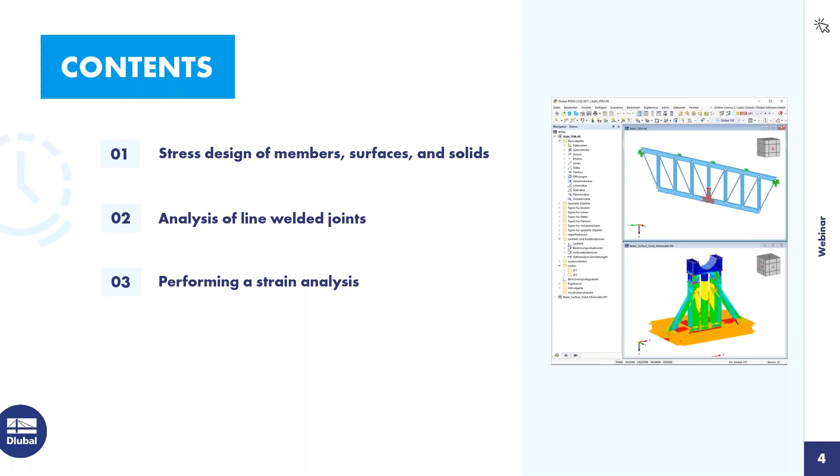I will do it as a live demonstration, so I didn't prepare any additional PowerPoint slides, so I will jump directly into the program. And today I also would like to work with predefined files in order to keep the focus on the essential topics.

What do I have here? I have a mixed structure here, mixed in the meaning that I have a member structure, surface elements, and also solids. Let me quickly change the rendering so you can easily see the differences. On the bottom, we have this member structure.

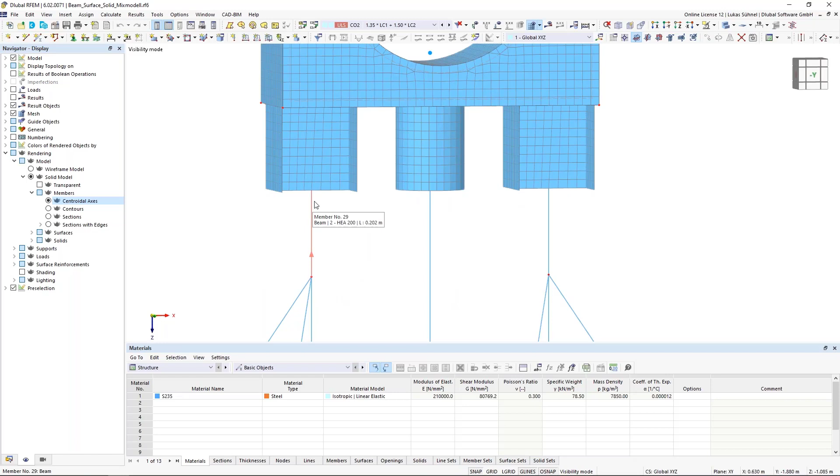Then I converted a certain part of my members into a surface structure, as you can see here. It's just the continuation of my members if I display them again. And on top of that, I have my solid model on which I will place some loads.

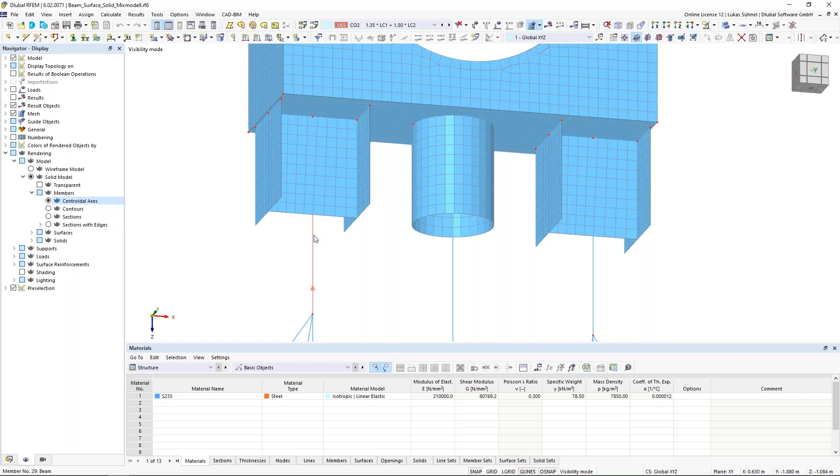Regarding the modeling, which is maybe also interesting to know, in general we can model members, surfaces, and solids in one structure, which is already quite nice. And if you think about the load transfer and the correct transfer of the stiffness, you have to take care of some things when you have 1D elements and 2D elements.

By simply converting these members into surfaces, as I did here, often you don't have a properly defined connection. You can see it on the left. The surfaces in that area are now basically supported on only one FE node, the FE node where this member connects to the web of this beam.

That is of course not correct. You would definitely get singularities in that area, and the stiffness transfer is also not correct. Another example can be found in the center. We have here a pipe section. And when you convert a pipe section into a surface, you get, of course, the pipe surface.

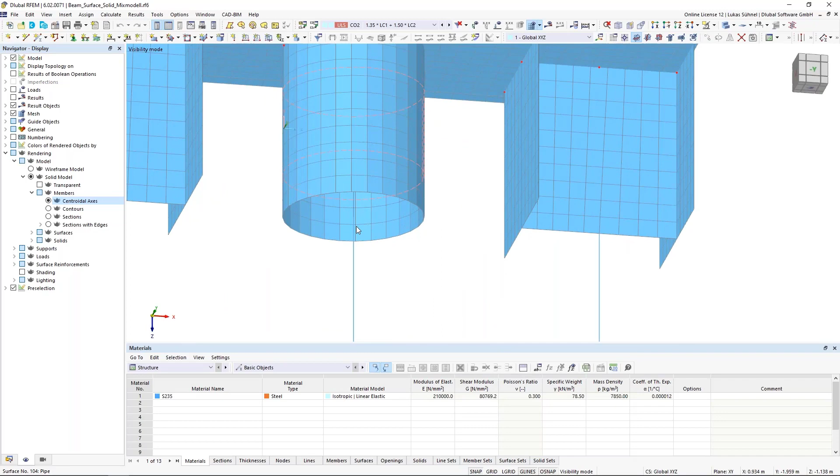And in such a case, you have no connection at all. You can imagine the member is in the center of that circle, and the surface is of course not connected to that member at all. So here we also have to do some modifications in the modeling to have it properly connected.

And I have it here, I just didn't show it so far. So I will cancel my visibility mode, and the connection can be done in, let's say, two ways. I can use so-called rigid surfaces, and this simply will transfer all my forces and my deformations that I have in this beam, or also vice versa in that surfaces, via a stiff surface onto the other side.

In the center, it's even more crucial, because with this stiff surface or rigid surface, I'm connecting my member with my surface. Before I had no connection at all. And again, of course, all deformations and internal forces will be transferred from the beam to the surfaces equally, let's say.

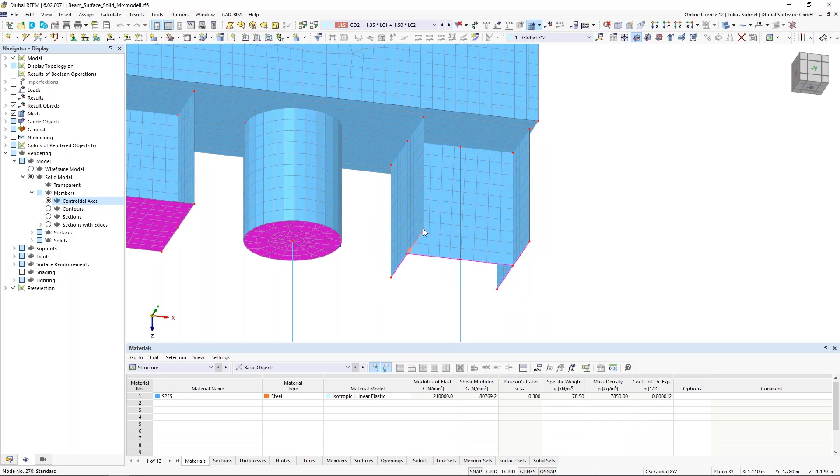An alternative modeling is visible here on the right-hand side. Instead of using a rigid surface, I simply assigned rigid members onto the boundary lines of my surface model. A member with a member type rigid, and it works similar to my rigid surface. So this is how you can connect a 1D element with a 2D element. The rigid surface or rigid member may help you here.

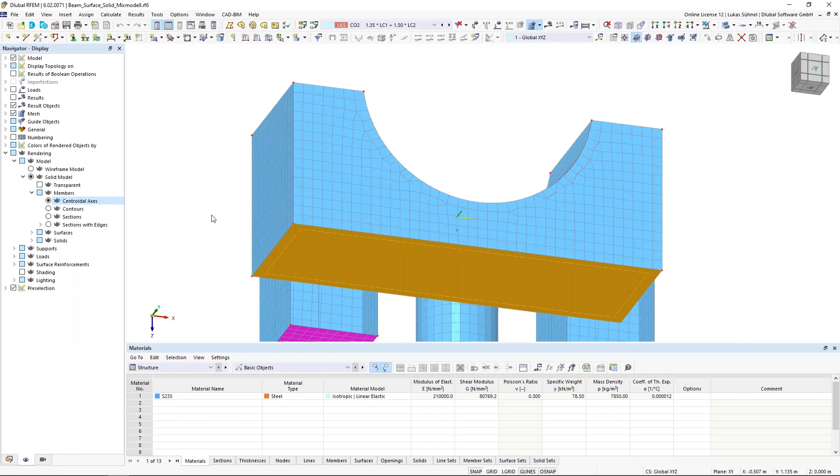Regarding the connection of a surface model with a solid, well, this is quite easy. The surfaces are defined by the boundary lines. These are those lines here, which you can see, and these lines are placed inside the boundary surface of that solid, and we have a so-called automatic object detection in those surfaces.

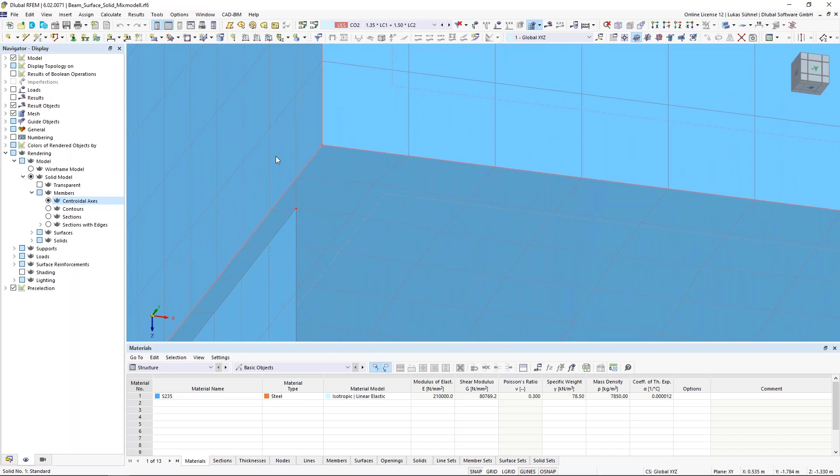So the surface detects that there are lines placed inside the surface, and if that's the case, then the FE mesh generator will automatically consider those lines when the mesh will be generated. So we have a fixed connection between those lines or these surfaces and the solid. So far regarding the modeling.

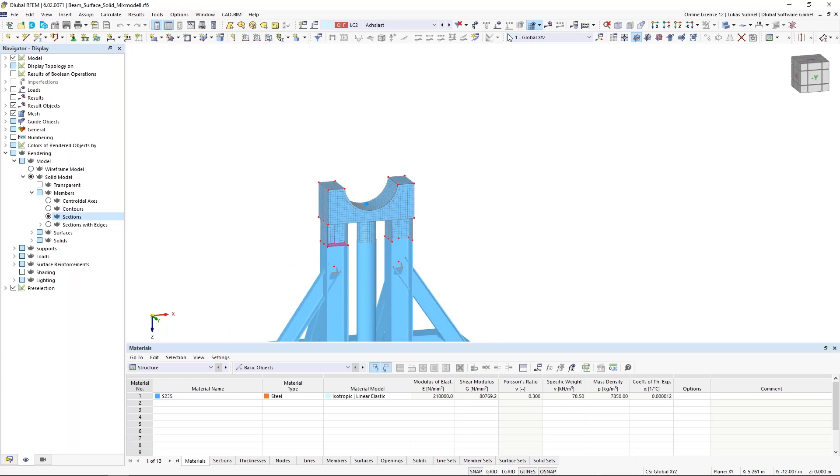Regarding the loading, these are German names, never mind. I have two load cases. I have my dead load case here, and then some load in my live load case. That's all I want here in that example. And of course, we have the combination of those load cases using an ultimate limit state design situation and a serviceability limit state design situation.

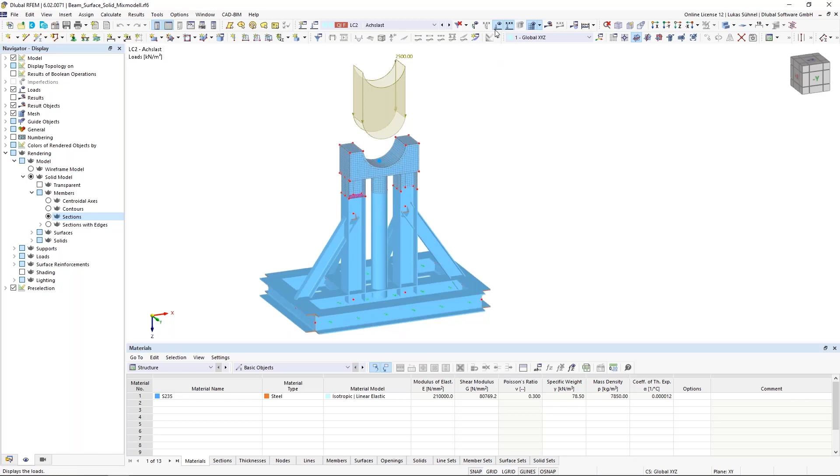Now, if we want to design such a structure, we have, let's say, two main designs that we have to run. We have to run a stress analysis or a cross-section check for our objects, and we have to run a stability design. Regarding the stability design, I would like to take a look at the results first. So that's what I will do now.

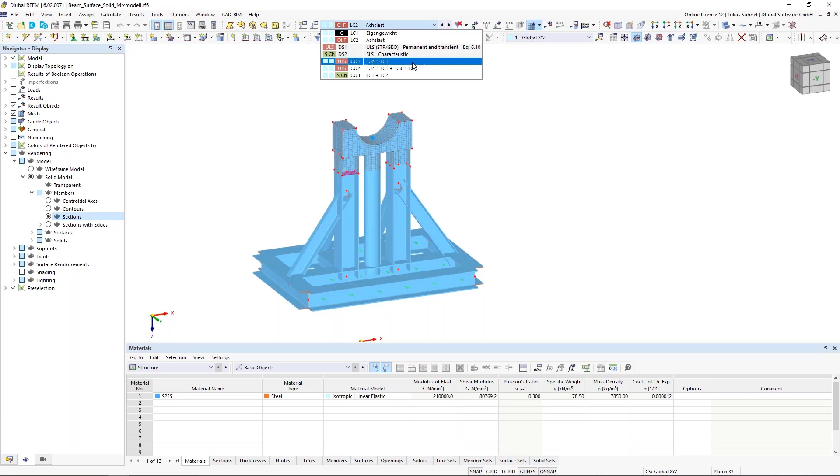I will calculate the, let's say, the important load combination. I have just one here that actually matters, the combination of the dead load and the live load. And let's have a look at the results. Maybe just on the members for now. I can display the axial forces in here, maybe in a different view like that.

All right. And what I can see here is I have, of course, compression in my, let's say, columns or in my members. So compression is, of course, a sign for buckling. So if I have compression in members, I have to check buckling. And what else do I have? I have some shear forces inside, but they are really small. So shear buckling is most likely not an issue. I have really small torsional moments.

I can neglect them. And my bending moments, My and Mz, are also quite small compared to my cross section or to the dimensions of these beams. So I would say also the bending moments can be neglected. What does it mean? If I neglect the bending moments, then lateral torsional buckling is most likely not an issue.

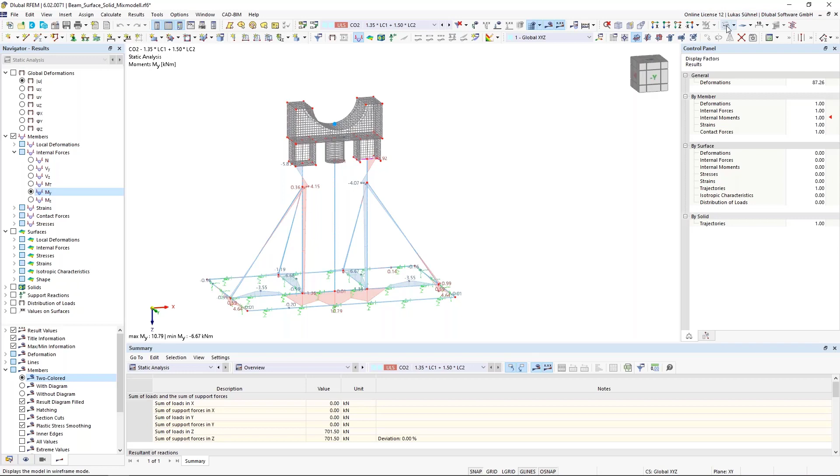And if I check again my structure, I have all these diagonals here that are connecting to my columns, a pipe section, which is where lateral torsional buckling is not important at all. So I think it's fair to say lateral torsional buckling is not an issue here. What could be an issue is, of course, buckling.

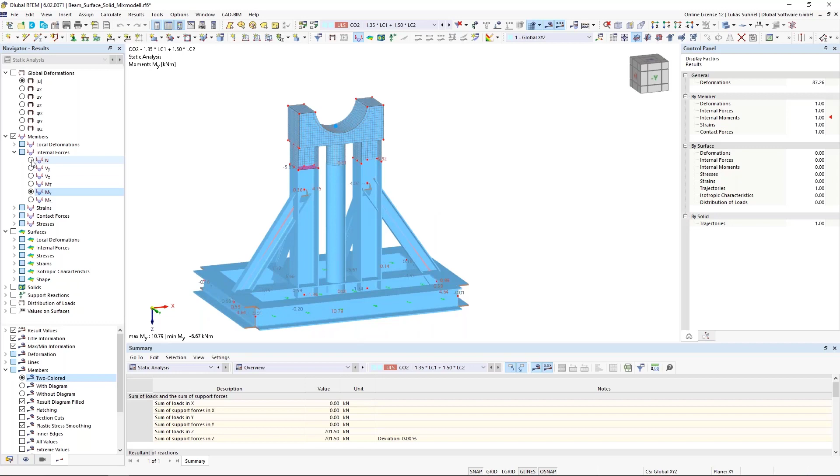But for buckling, I can use some limit checks or, let's say, some specific checks to judge if buckling is actually an issue. And such a check can be found inside the Eurocode 3 in chapter 6.3.1.2(4).

The formula basically is you take the axial force in a member and you divide it by the critical force of a member. And if that is smaller than 0.04, then you don't have to run a buckling check for a member. If we switch it around, if we say the critical force of a member divided by the existing force, if that is bigger than 25, then buckling is not an issue. And this is a value we can check via a specific add-on.

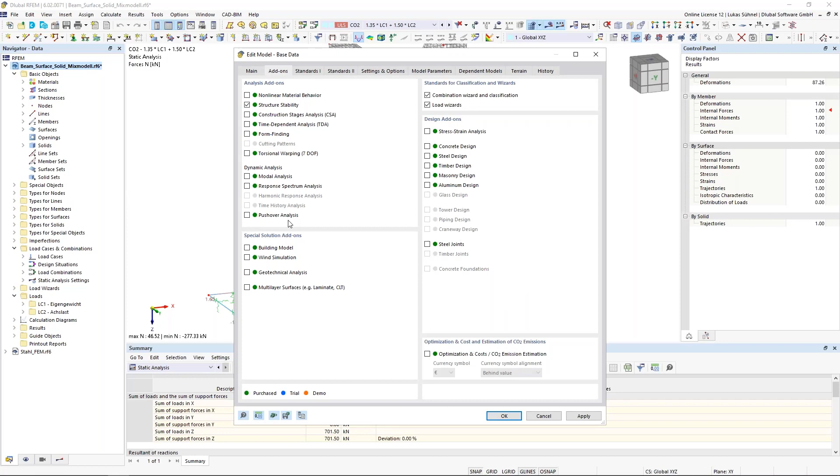And I want to do it quickly before I start the stress strain analysis. So if I go into my add-ons, I can activate the structure stability add-on. Now this will calculate this critical load factor, which is the same as I just said, the NCR, the critical force divided by the actual force. And I will calculate it in this specific load combination. I can activate now the calculation of the critical load, and I will start the calculation.

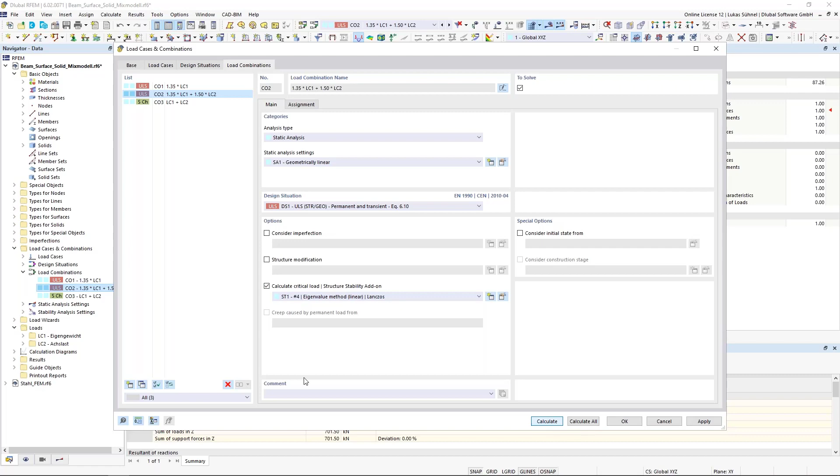So this add-on will calculate this critical load factor. It will also calculate buckling lengths and so on, buckling length factors. For me, important is now only the critical load factor. And again, if that is bigger than 25, then buckling is not an issue. Just a few seconds more. All right, there we are.

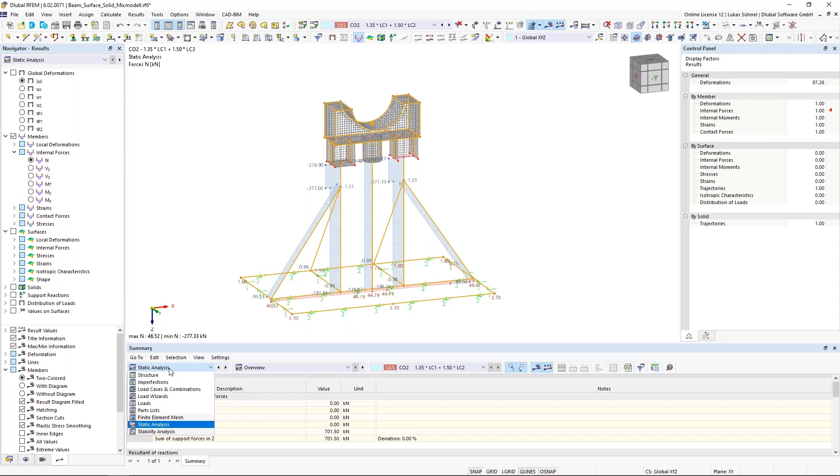So how can I display these results? Well, I can switch in my tables to this stability analysis add-on. And the first value that will be shown here is already the one that I'm interested in. The critical load factor is 29, which is bigger than 25, so I'm good.

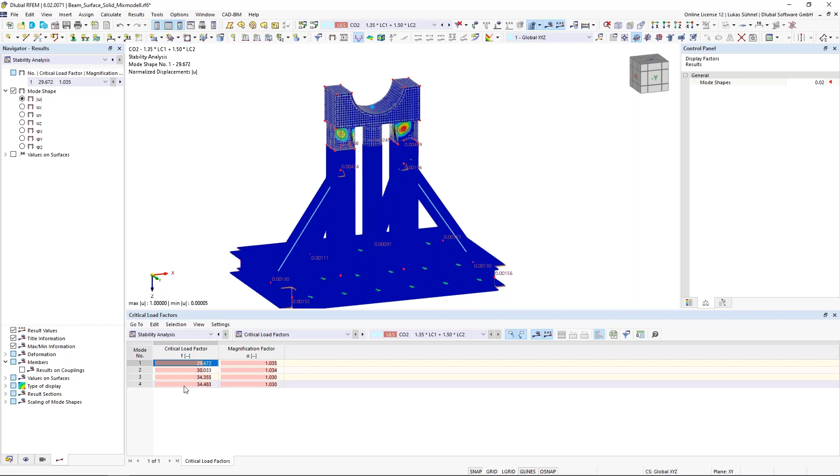And if I want to analyze it even further, I would have to look for an eigenmode that actually deals with the buckling. And this could be, for example, the fourth eigenmode. And here we see this would be some kind of buckling for my columns. I have here the factor 34.5, so much bigger than 25. So I can easily say buckling is not an issue.

Now I excluded buckling and lateral torsional buckling. That means it is enough to simply run a stress analysis for the structure. I can do it, let's say, in two ways. First of all, I would like to check what result the basic RFEM gives me. So I go back into my static analysis results without using any add-on. And I can see that RFEM calculates the deformations, of course. It calculates the internal forces in members. It calculates the internal forces in surfaces and so on.

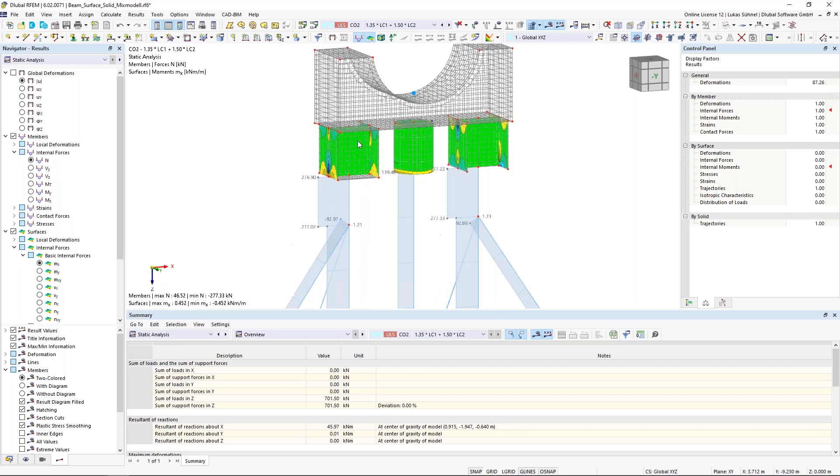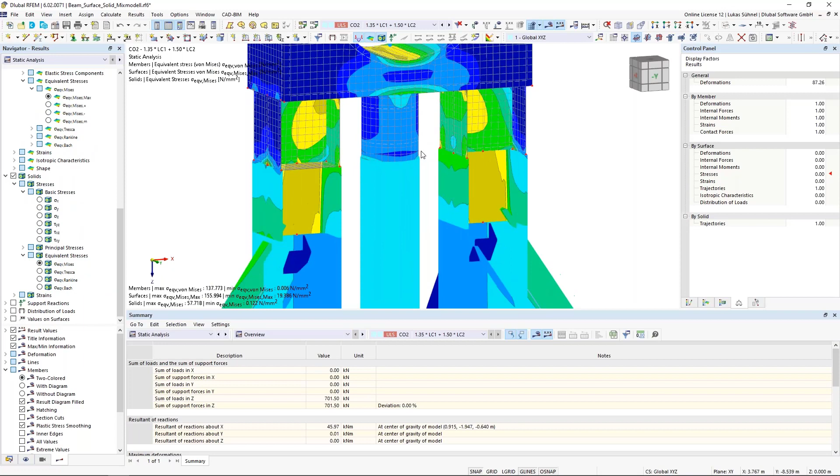But it also gives me the stresses in members. So for example, the equivalent stress according to Mises. It also gives me the stress inside surfaces. And of course, also in my solids. So now I'm displaying the stress on all elements.

And you could use the information in this panel on the right-hand side, or this max-min information on the bottom left of this graphic window to see that the maximum stress for members, for surfaces, and for solids is below the yield stress from my steel S235, 235 Newton per square millimeter. We are actually below the limit. So the stress check is fine.

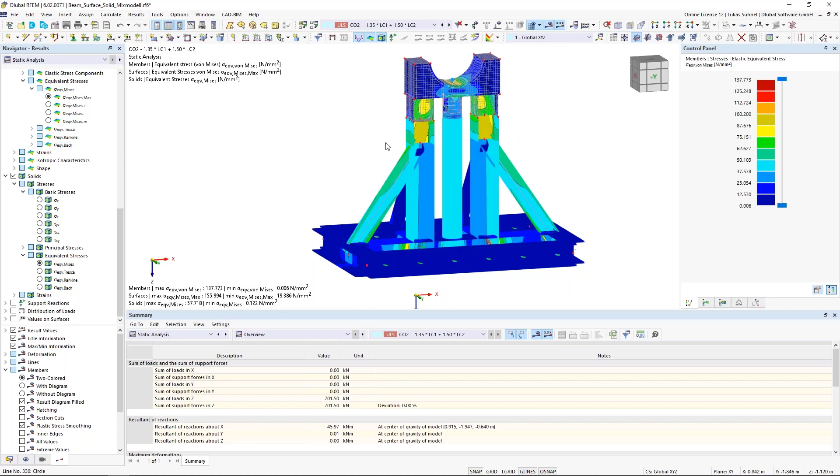Now, if you prefer a design ratio, not just a graphic which shows that stresses are smaller than 235, then you could use the stress strain analysis add-on for that. So let's check this out as well. I will activate the add-on in my add-ons tab, as I did it before with the structure stability. The stress strain analysis add-on can be found on the right-hand side under the design add-ons.

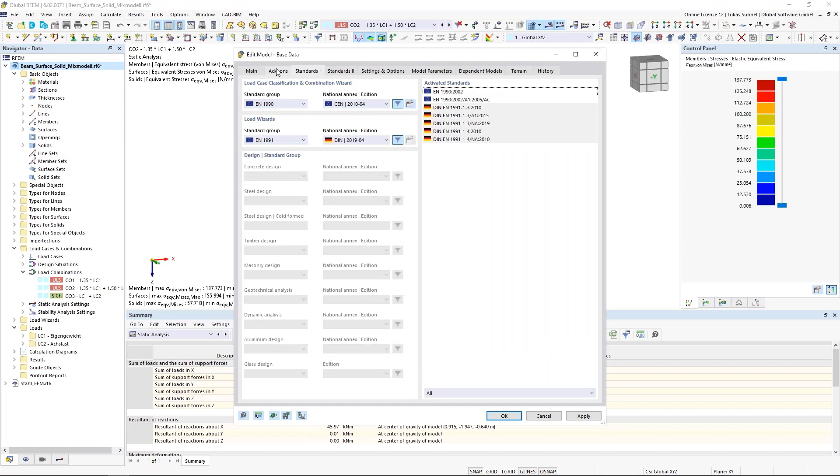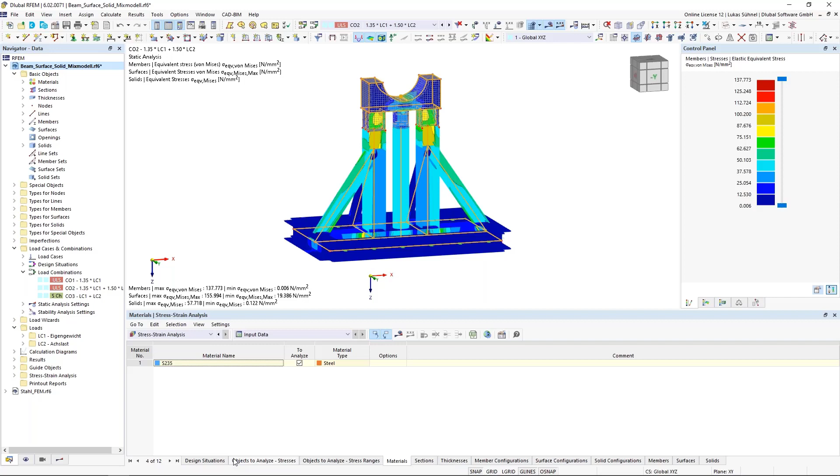And usually we have to deal with the standards. If we run a steel design or a concrete design, then the standard is important. The stress strain analysis add-on is standard independent, so we don't care in that case. Now, when you activate an add-on, you get a new entry in the tables, and this is how I personally usually deal with the add-ons. I go into my table on the bottom and click through these subtables. Let's do it for this example.

Just use a different display. I'm here in the input data in the first subtable design situations, and here I can decide which design situation should be analyzed. Of course, it makes only sense to analyze the ultimate limit state and not the serviceability limit state design situation, so I deactivate the second one.

In the next table, you can select which objects you want to analyze. Here, all objects are selected. Of course, you could select the surfaces or the members that you want to analyze if it's not all of them. In my case, I will simply analyze all.

There's another table which looks quite similar, but this is called objects to analyze stress ranges. So if you want to run a fatigue design afterwards, for this design you need the stress range, so the difference between the maximum and the minimum stress on a certain location. Then you can also select those objects where you need the stress range for. So in my case, let's say I need the stress range in my solids, then I'm selecting the solids.

The additional tables are, let's say, more or less for an overview. You can see which materials and which sections will be analyzed here. And the section and the thickness table have one additional functionality that I would like to mention briefly. You have the possibility here to run an optimization for sections or for thicknesses.

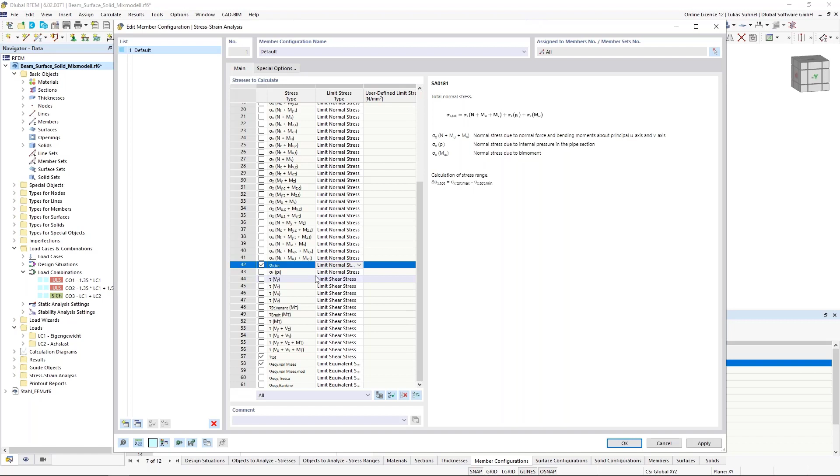So with the click in this table, you select which stresses you want to calculate, and with the center column, you can also define the limit stress. You can see here the limit normal stress, limit shear stress, and limit equivalent stress is selected. We try to do it automatically for certain materials. For some materials we can't. In that case, you can select here user-defined, and then you can enter a value in the last column. In my case, I'm using the limit normal stress.

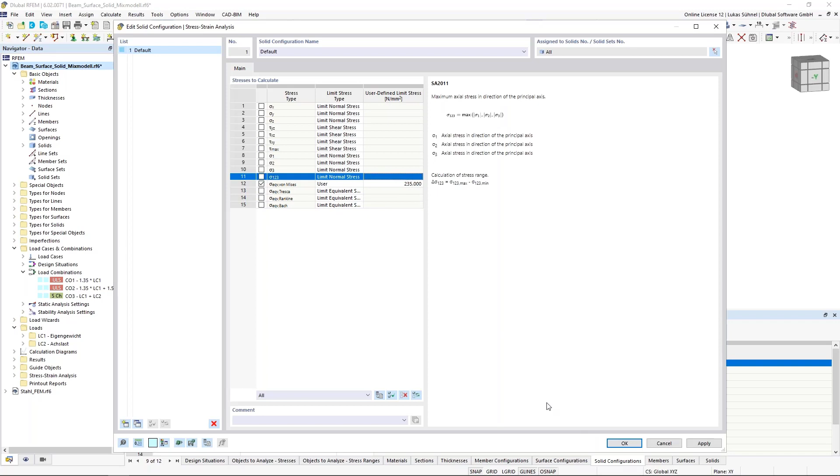All right. For the surfaces, the same configuration basically. Let's select only those two. And also for the solids, we have a configuration. Again, I'm only interested here in the equivalent stress according to Mises. And just to show it, we can enter here a manual value, maybe 235 Newton per square millimeter for my material, which is an S235. So that makes sense.

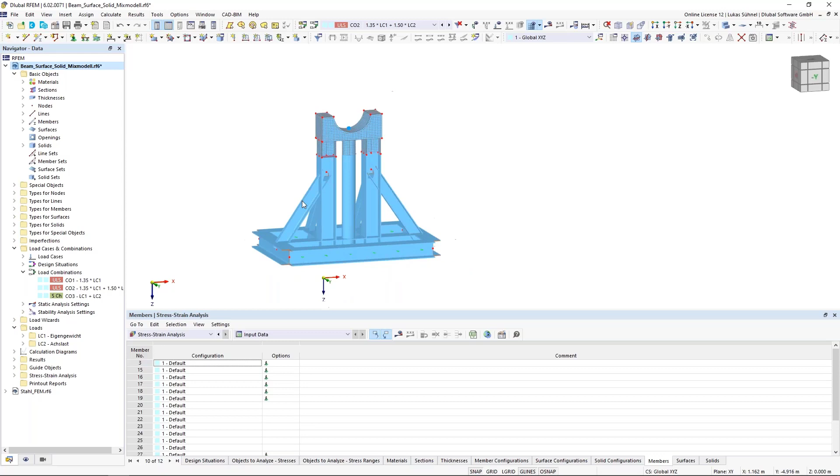In the last tables, you can assign the different configurations that you may have to your members, but you can also do it graphically. So let's say you have multiple configurations for your members. You can edit the members and simply assign the configuration in that window to them. So the handling, I'd say, is quite easy. We already finished with the input, so we can run the analysis.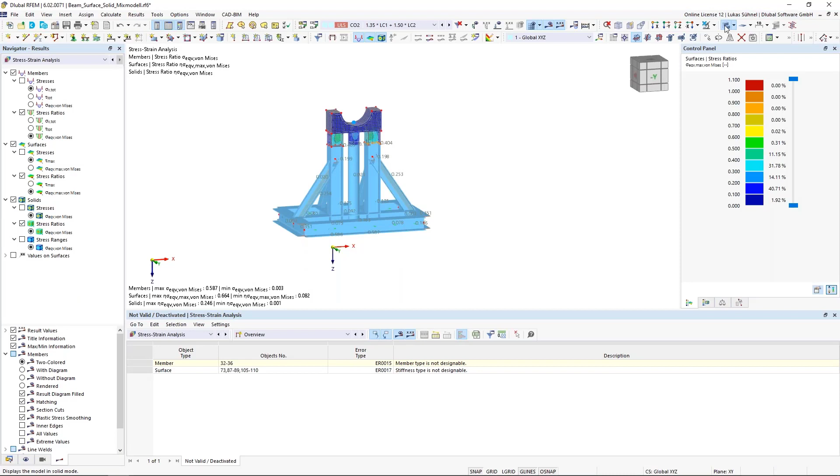All right. So after the analysis, we get results graphically and also in the tables. Let's start with the tables first. If there are design checks which are not fulfilled, or you have selected maybe objects that can't be designed, then you get an overview table. If everything is okay, you won't see this overview table.

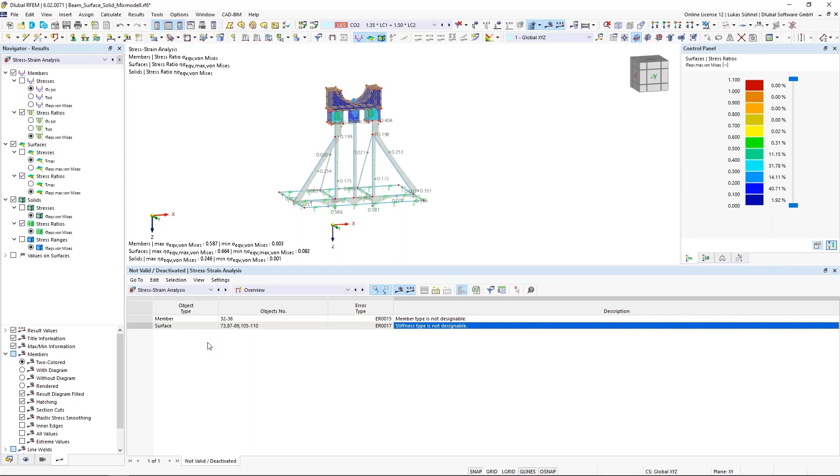Just in case something is not correct or you get a warning, then it will show up as it is shown here. We can see here for some members and some stiffnesses or some surfaces, basically, the design is not possible. That's nothing which should bother us. At the beginning, we said, please analyze all members. All members also included the rigid members.

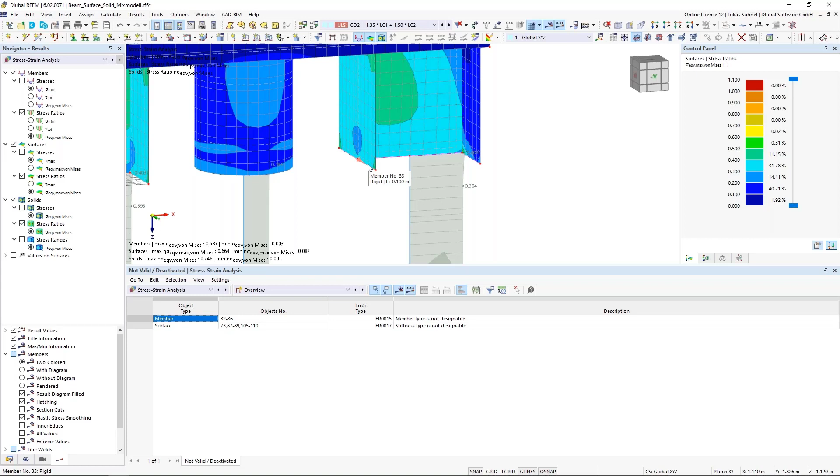That makes no sense, basically. We have no section for them. We have no material assigned to them. We can't analyze them in this add-on. That's what this add-on just tells us here. They are not designable. And the same, of course, for the rigid surfaces. So nothing we have to worry about in that case.

If you want to see the details of the results, then you can go into the stresses on members tables or stresses on surfaces and stresses on solids, of course. So this is the table output, with different filters by design situation, or maybe for each surface, the maximum stress, or for the various thicknesses that we have assigned here. So these are the filters basically for the results.

We can also display these results graphically. On the left, you can see that we have here an updated result navigator now for the stress strain analysis results. And here we can select the stresses in our members, on the surfaces and so on. I think this is quite clear how to handle that.

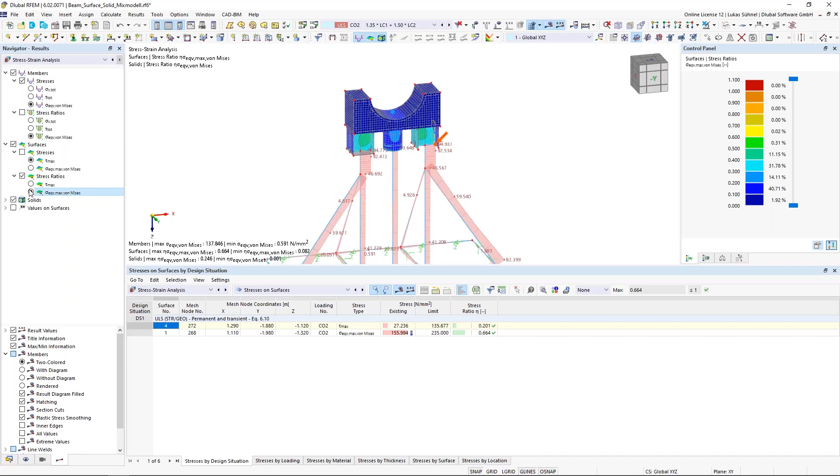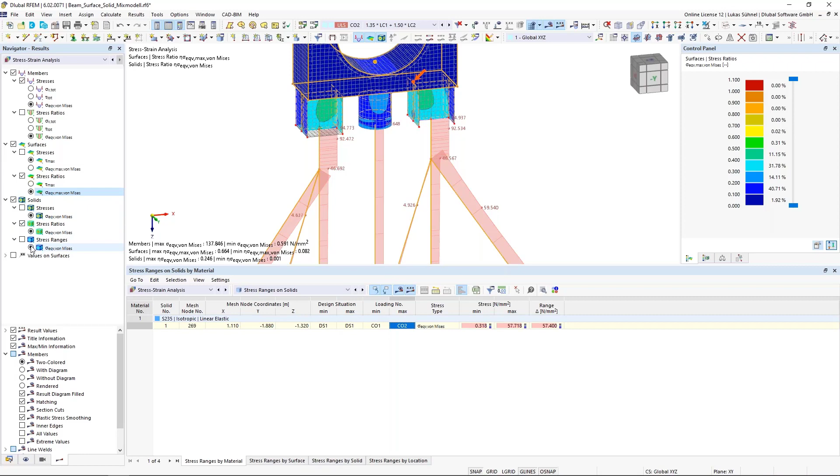And the last information here, we also selected the solids for a stress range analysis. Again, those results can be found in the tables. This table looks a bit different, as you can see. You can see the minimum stress, the maximum stress, the range, the difference basically. And you can also see which combinations are linked to this stress range. All right, again, we could display this graphically.

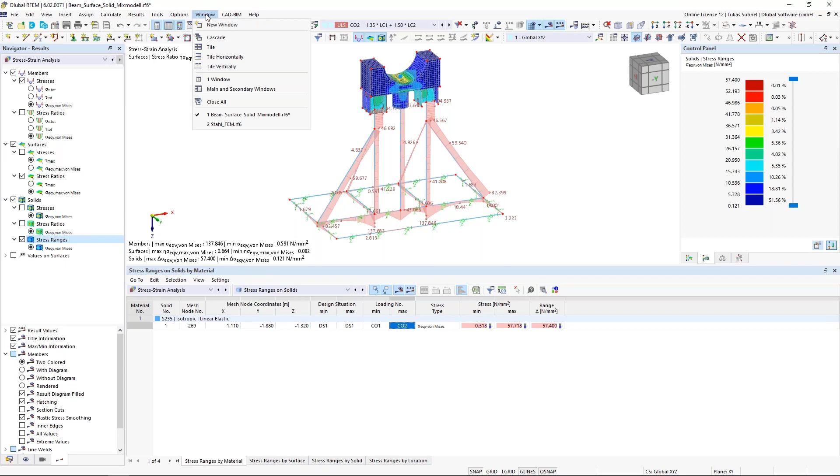So far regarding this basic functionality, the stress analysis on members, surfaces, and solids. And now I would like to switch to my second chapter, where I would like to show you the stress analysis of a line welded joint. For that, I have a different structure. And let me quickly explain it. It's a 2D truss member.

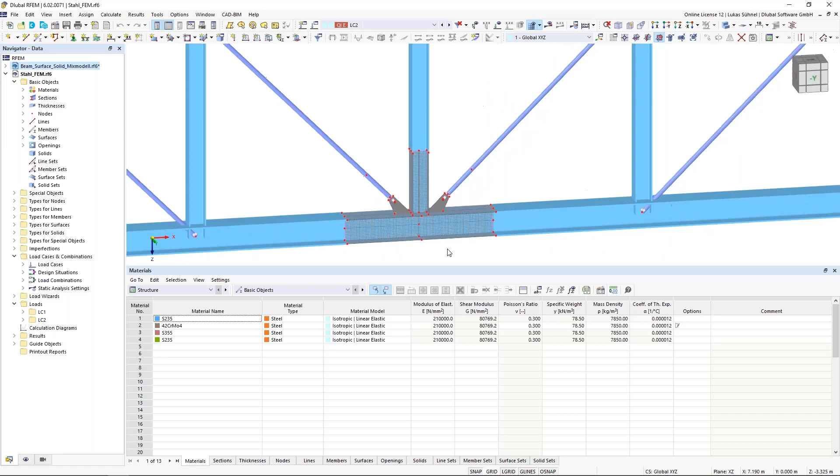Basically, the tension forces will be taken over by these round bars, the compression by these HEA sections. And one particular detail joint I wanted to analyze with surfaces. You can see the rest of the structure is again a beam structure, a 1D element structure, and this specific detail I want to analyze in detail using surfaces.

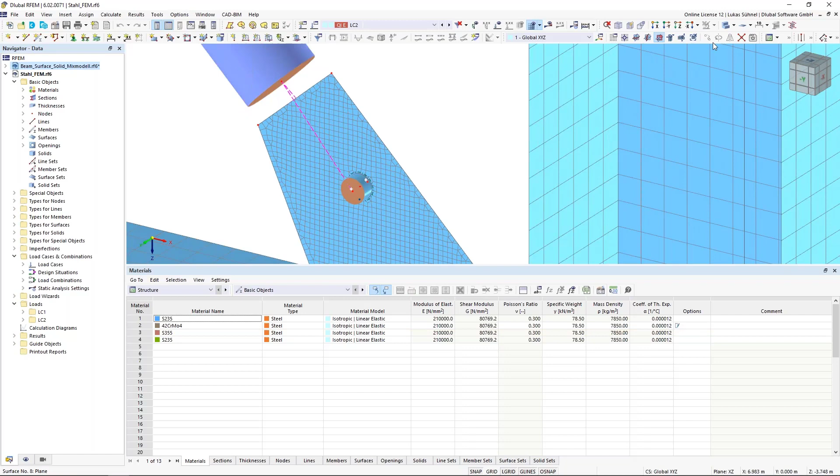I modeled the connection plates here, these tension members are connected to this bolt, and this bolt transfers then the forces onto my connection plate. The force transfer, for those who haven't seen that before, can be done like this. Usually you create an opening inside that surface, of course, where the bolt goes through. But if you have a bolt in the center as a member element, it's not connected to the surface.

So somehow you have to establish this connection between this node and this connection plate. And this can be done using a specific surface. So I filled that hole again with a surface, and that surface has a stiffness type without membrane tension. And this specific type simply acts only under compression.

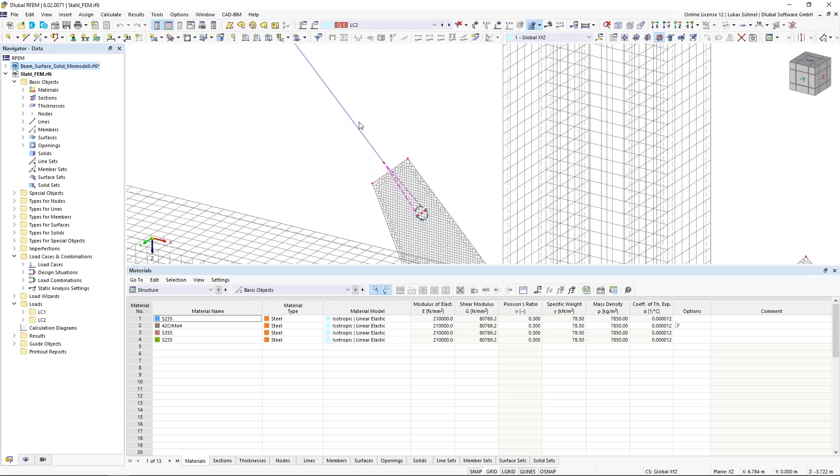So you can imagine if we have tension forces in that tension member, then the bolt will be moving to the top left, upwards, and we will get compression in that area. We will get tension on the back side of this plate, but since this surface will fail under tension, we have only forces on the left-hand side. And this is a good feature to consider this connection between the bolt and the hole.

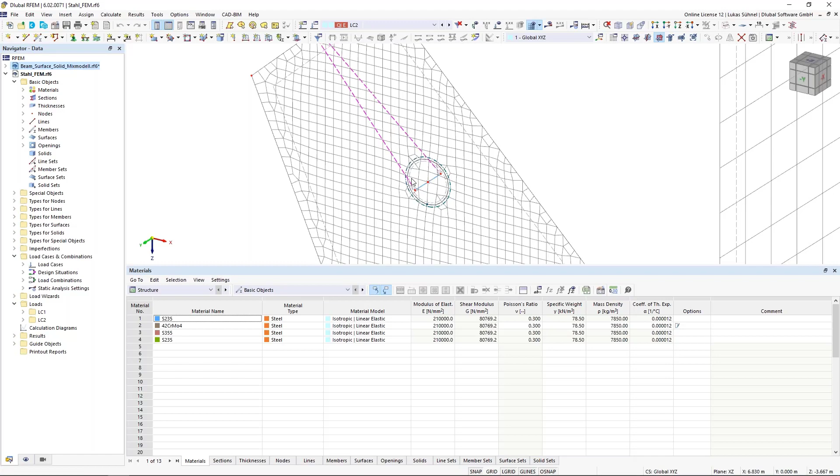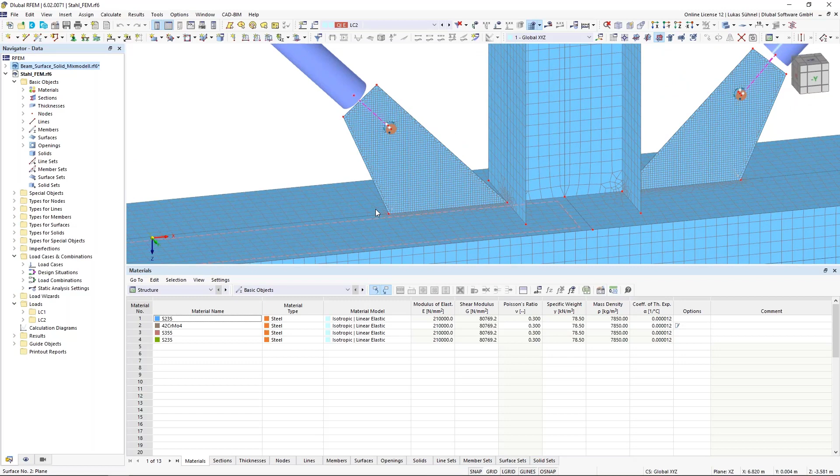All right. So far regarding the modeling, I have, of course, my steel connection plate here, and the steel connection plate should be welded to my top flange of this I-section. Now, if I want to design such a weld, I can use this new object which we have in RFEM 6. It's called line welded joints. You can find it under types for lines.

And you can define a new type in here. Let's say this weld that I want to design is a T-joint, a single fillet weld, continuous arrangement, and the weld size is 4 millimeters.

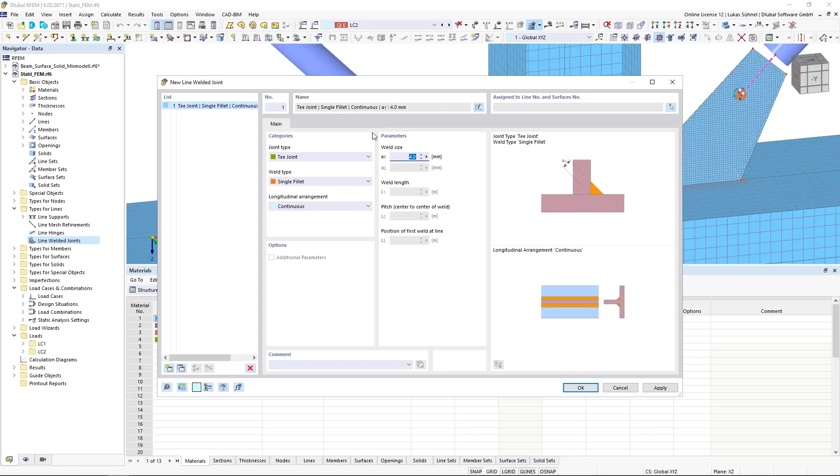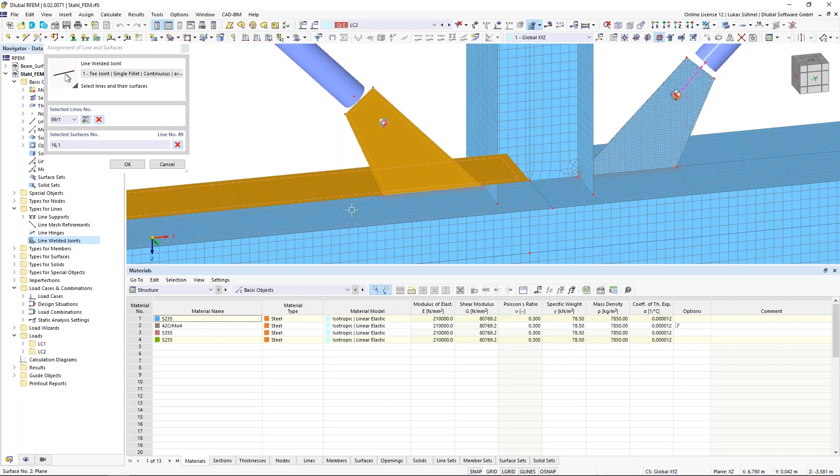So far, so good. Now I can assign this type to my lines, and the weld should be placed here. And it's not enough to just connect the line, we also have to select the surfaces that are participating, basically, and that's this connection, or the steel connection plate, and the upper flange of my beam.

Okay, that's how we can define such a line welded joint. We will show it as such a dotted line on each of the participating surfaces.

And if you want to design such a weld, you need the stress strain analysis add-on. Basic RFEM 6 won't give you any results for that line welded joint, so it's required to have the stress strain analysis add-on. And that's why I'm activating it again.

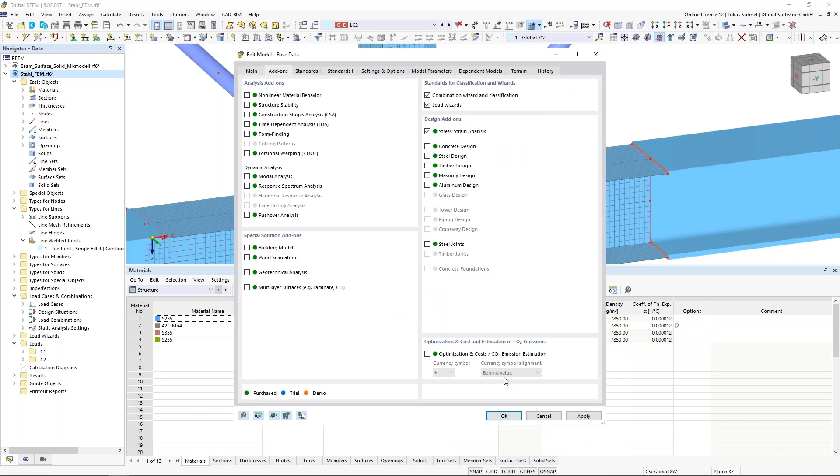Now let's go quickly through the input of this add-on. I'm starting again with the design situations. Yeah, I think that is clear.

Objects to analyze. In that case, I don't care about the stresses in my members, or let's say I want to select just some of the surfaces that I want to analyze, not all of them. And of course, I want to analyze my line welded joint. Stress ranges, I don't care in that case here.

And I will continue with the surface configuration. Again, I will select just some of the stresses, I'm not interested in all of them. Maximum shear stress, maximum stress according to Mises is quite interesting for me.

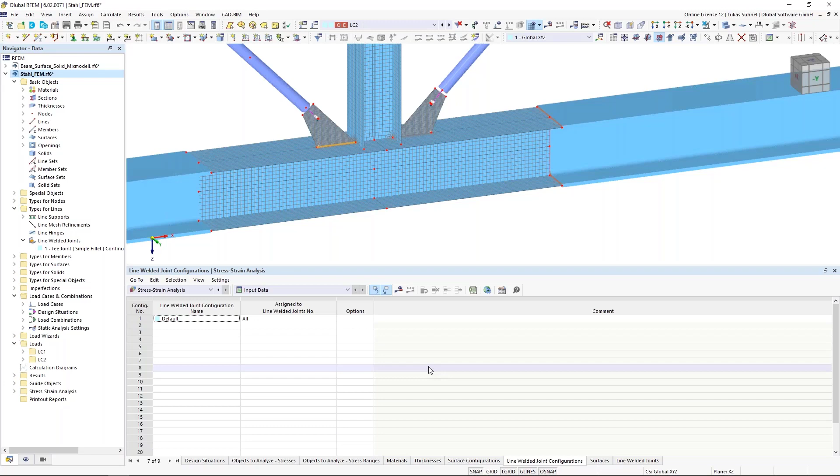And now we have also a new configuration for my line welded joint. Each specific object has its own configuration: surfaces, members, solids, line welded joints. And in here, it looks basically the same. I can select which stresses I want to calculate.

Even though you select maybe all of them, not all of them will be shown. It depends. For my fillet weld, which I have here, I have two different methods, the simplified method and the directional method, for example. Let's say we are using the simplified method.

That method, I only need the following stresses, those four, and the resulting weld stress. If I select the others as well, they won't show up in my result table. They are not part of this simplified design method. So that's why I select just those four, those five.

And same logic as before. When we select the stress, it means we tell, or we say to the add-on, please calculate the stress for this specific stress type.

Defaultly, or as a default, we do not get the limit stresses for the welds. You can see it here, it's selected none. Why is that the case? Well, we are standard independent in that add-on. The limit stress for welds is, however, standard dependent usually.

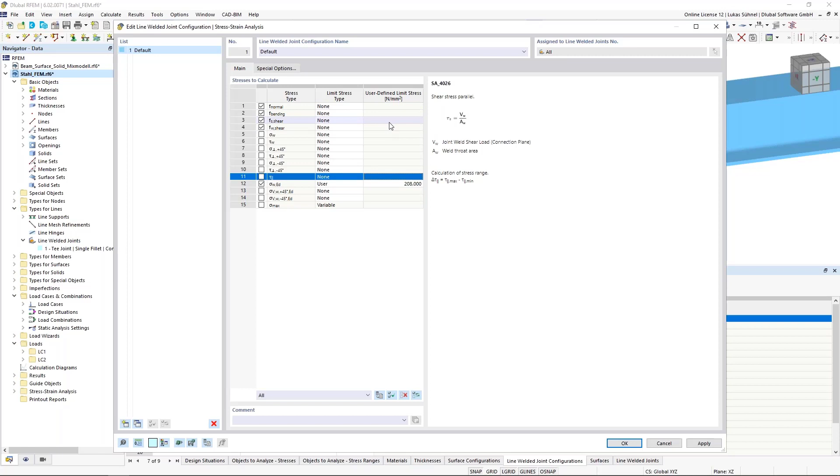Let's say we assume here a Eurocode design, then the limit stress for this simplified method would be for an S235, FU divided by square root 3, divided by beta W, divided by gamma M2, which is 208 Newton per square millimeter. I could also enter this limit stress for the other types, but it doesn't matter. I only need it for the resulting stress.

All right, so far so good. I defined all necessary inputs, and now I can run my stress strain analysis again.

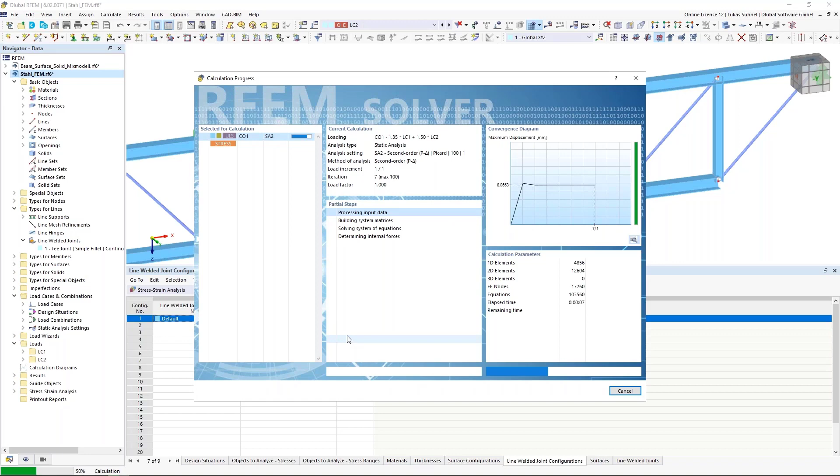Okay, I get the overview table. It shows me some exceeding stress for my surfaces. I will take care of that later on.

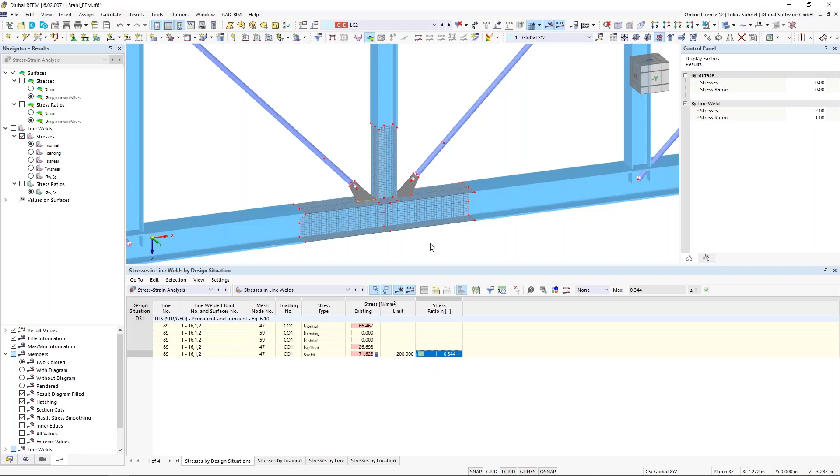Now I'm interested in the line welded stresses, and we can see here we have an existing stress of 71 Newton per square millimeter, which is smaller than the limit. So we get the design ratio, and the weld has been checked.

We can also display the results graphically as usually. Just let me show it quickly. We get the diagrams also shown here. Maybe it's better to select a specific visibility for them: the different stresses, normal stress, shear stress, resulting stress, and of course also a stress ratio, and that's it.

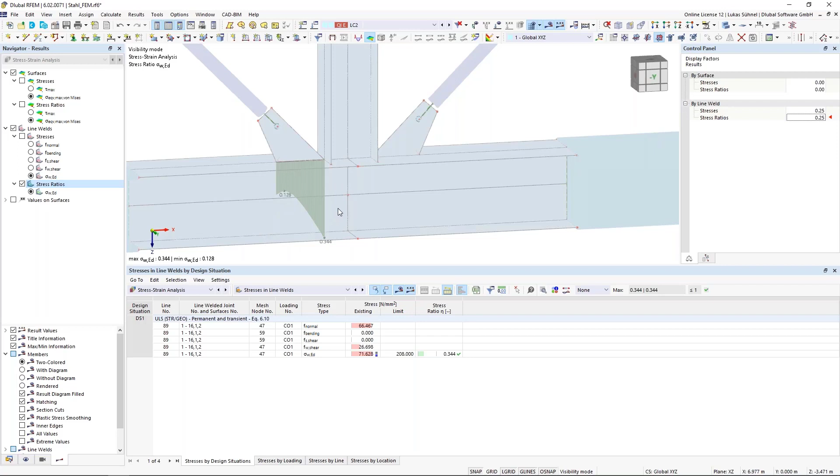You can of course print these graphics into your protocol as you are used to in Dlubal. The tables will end up in the protocol, so I think the handling, the post-processing is clear. So far regarding the line welded stress or line welds.

Let's analyze this exceeding stress in the surfaces. Let's display everything again. Maybe let's turn off the FE mesh for a second. And of course, we need the stresses in the surfaces.

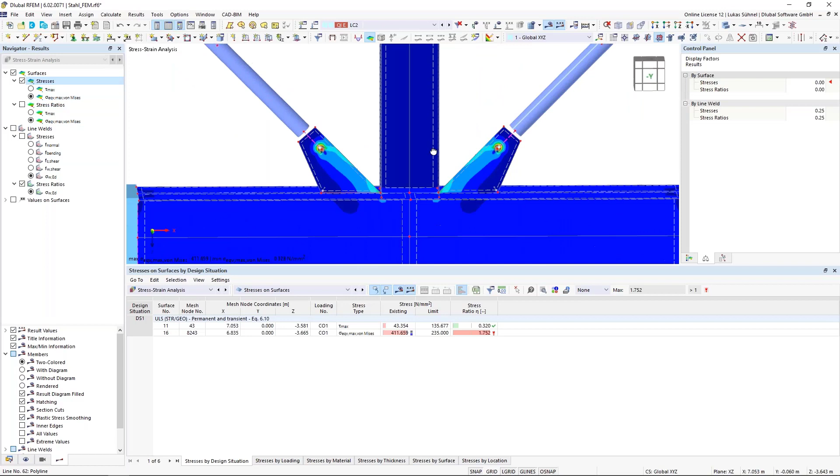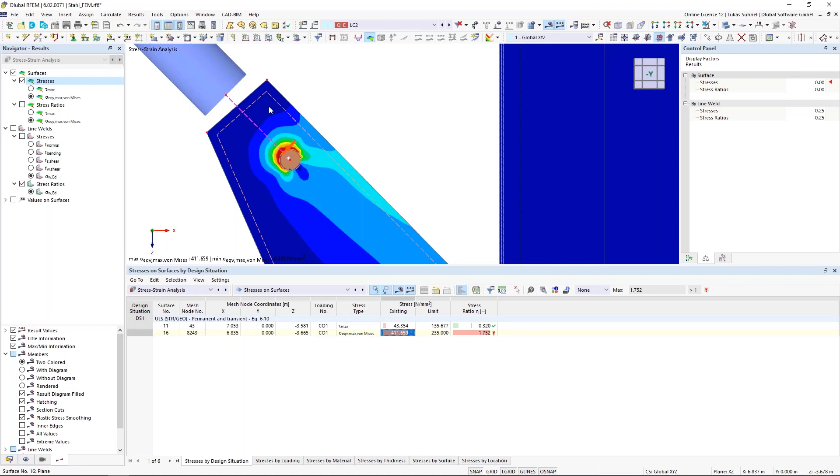So what we can see here in the table already is that we have an existing stress of more than 400 Newton per square millimeter, which is of course exceeding the limit stress. And we can also see by clicking on this table, this nice arrow, which shows us where the issue is. And the issue is where we have the bolts connecting to the connecting plates.

I think it's quite clear that such a stress cannot show up in reality, simply because the S235 will yield when it reaches the limit stress. It can't get these kind of stresses. The steel will yield, it will deform. So we get these high stresses because we use a simplified material model for our steel.

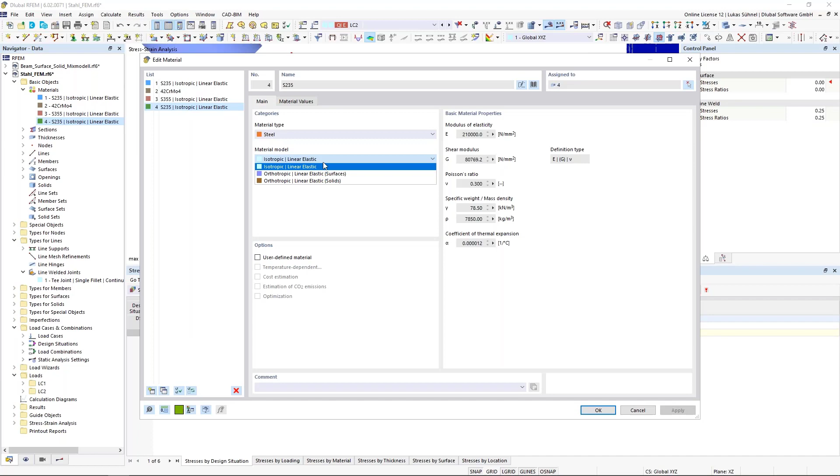The default is usually an isotropic linear elastic material model, which means we can get stresses like infinite stresses. Since this is not exactly correct, we could in theory use a different material model. The default material models are, however, only isotropic linear elastic models or orthotropic linear elastic models. Plastic is not supported as a default setting. If you are looking for more advanced material models, you would need the nonlinear material behavior add-on.

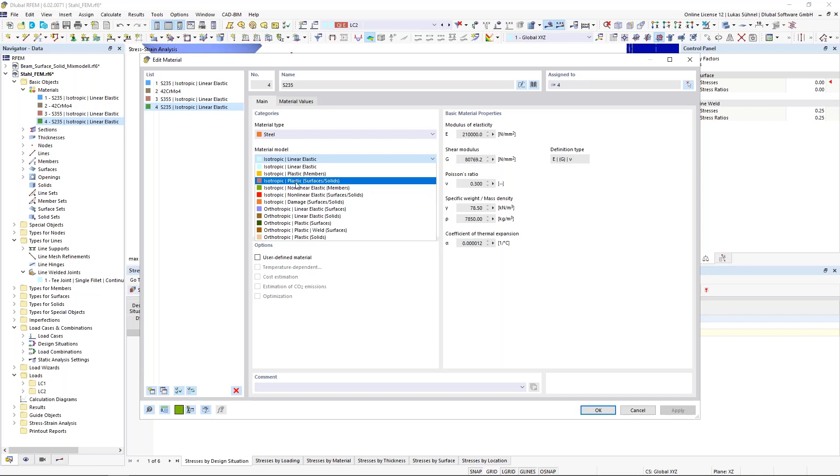I can select it here. And now you can see if I edit my material again, I have much more material models. For example, the isotropic plastic material model for surfaces and solids. That's the one I select. And these are the parameters for this material model.

I can select the basic or bilinear stress strain diagram. I stick to the basic diagram type. That should be enough for my case here. I could select the stress failure hypothesis. This is fine for me. And that's all I need to define.

If I assign this material model to my material, it means it will yield as soon as it reaches the yield strength of about 235 Newton per square millimeter.

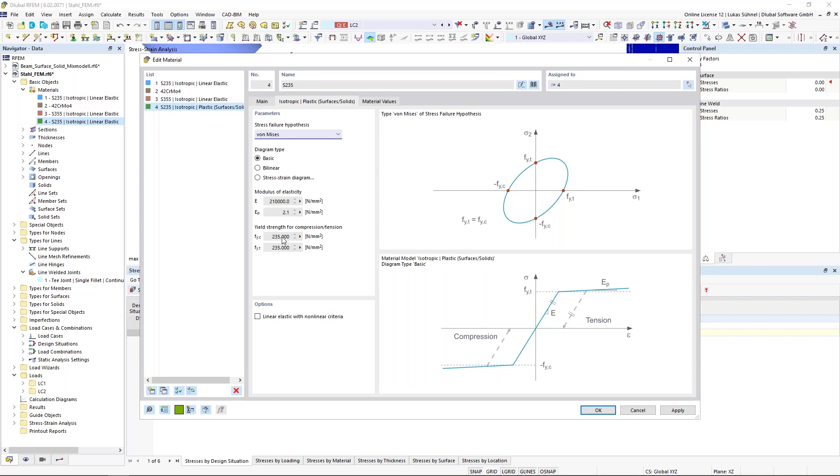How do we do this in the calculation? For that, I would like to show the FE mesh again. How do we consider this yielding? Well, you saw before that we had some stress peaks in that area here. The stress in those FE elements was higher than the limit stress.

If that is the case, with the plastic material model, we will reduce the stiffness of an FE element. So we take a look at each FE element and we reduce the stiffness of those FE elements where the stress is exceeding the limit stress. If we reduce the stiffness, it means they will deform much more than the other elements, where with the regular stiffness, they will take over more of those forces until they maybe also reach the limit stress. Then we will reduce the stiffness again, and so on and so forth. That's the logic that we're using here.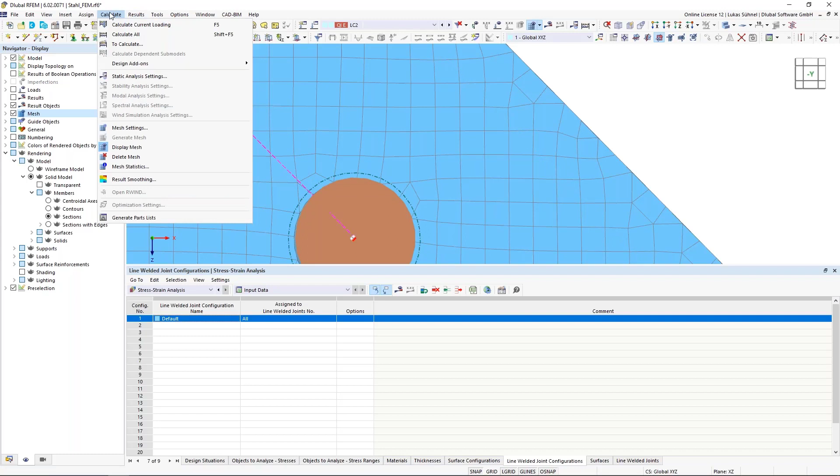So we take a look at each FE element, and since we do it on this FE element basis, we should also check the results on FE elements. What does it mean? I can go to my calculate menu, under the result smoothing function, and select here constant on mesh elements. The default, I think, is this one, continuous within surface sets, or otherwise within surfaces. So we get a lot of results for FE meshes, or for each FE node we get a result, and usually we use some functionality to smooth those results so that they look nice.

In this particular case, when we have this FE mesh specific look on the results, we should also smooth it constant on FE mesh elements. So we get this pixel-like look afterwards.

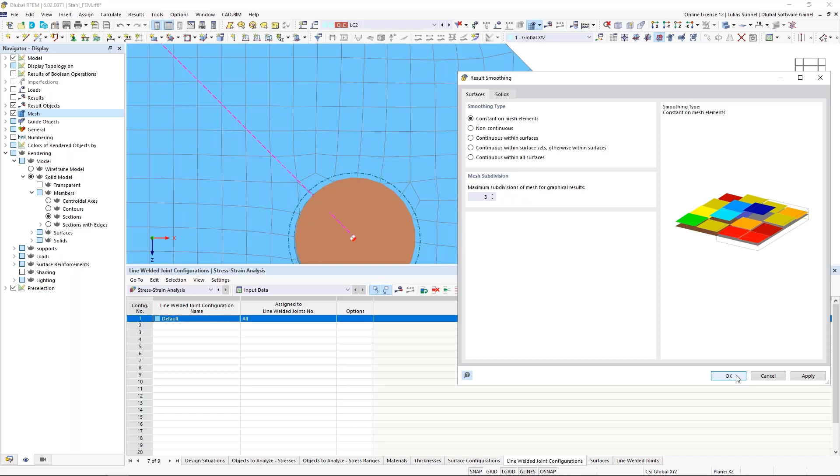This setting under calculate result smoothing is for the results of RFEM6 itself. We have the same setting in our stress strain analysis add-on. So if I go on the bottom left, stress strain analysis settings, I can also select it for this add-on, which I'm doing here.

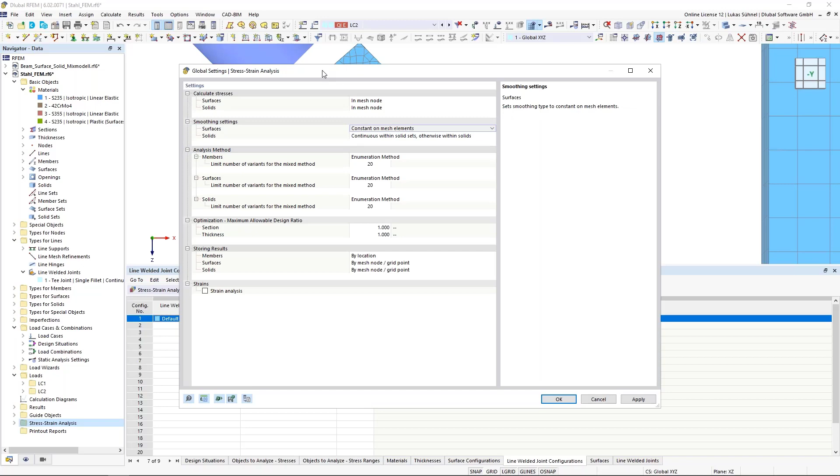Now I can recalculate the results, and small spoiler, we won't get any stresses higher than 235 Newton per square millimeter due to this material model. So the stress check is fine. It's not a big issue anymore, but that's not the end of the check.

We will get higher deformations. We get these plastic strains probably in our structure, and that's usually what you look at when you use the plastic material model. You check the strains because the stresses are not relevant anymore.

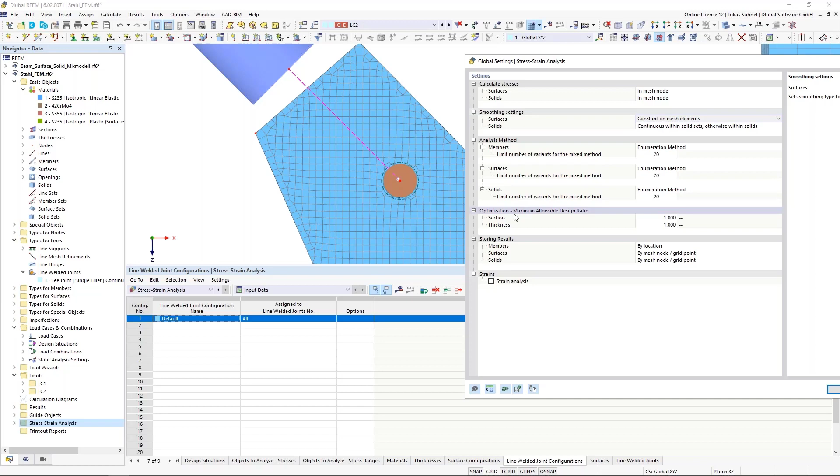And we can run also a strain analysis inside the stress strain analysis add-on. That's basically what the module name is - stress strain analysis. We can activate the strain analysis also in these global settings, where I change the smoothing settings, I can activate here the strain analysis.

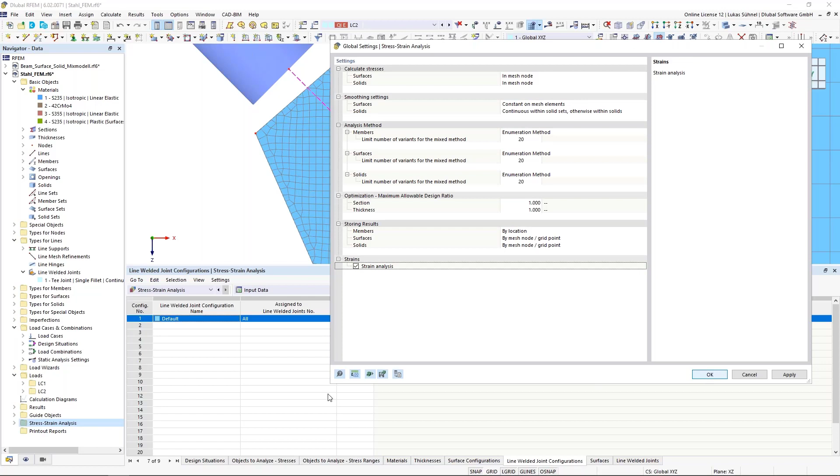I click on OK. And if I activate that analysis, I can go back into my surface configuration. And now I have this additional tab here. It shows me now strains. And again, I can select for which strain I want it to calculate. Let's say the Mises strain.

And we also have a limit defined for that. We have a plastic limit strain of 5%. That's what we defined here. You can change it, of course, by simply clicking into it and defining a different value.

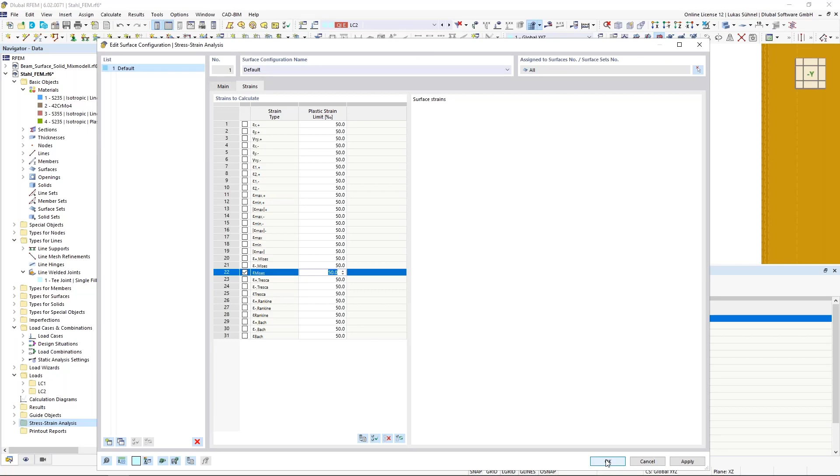That's what we're defining here as a limit. Of course, you could say your limit is when the strain is so big that the bolt moved completely through your connection plate, so that the structure is unstable during the calculation. I'm not sure if that's the right limit. We defined here the 5%, but at the end it's up to you.

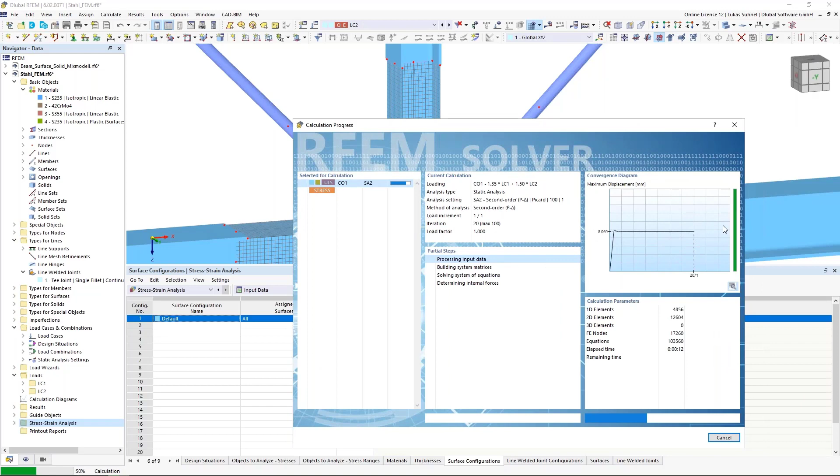All right, that's all that I have to define here. Now I can run the stress strain analysis again. It will take a bit longer because now it's a nonlinear analysis. Each FE element is nonlinear, so we will need more iterations until we get an equilibrium, but still quite fast in that example.

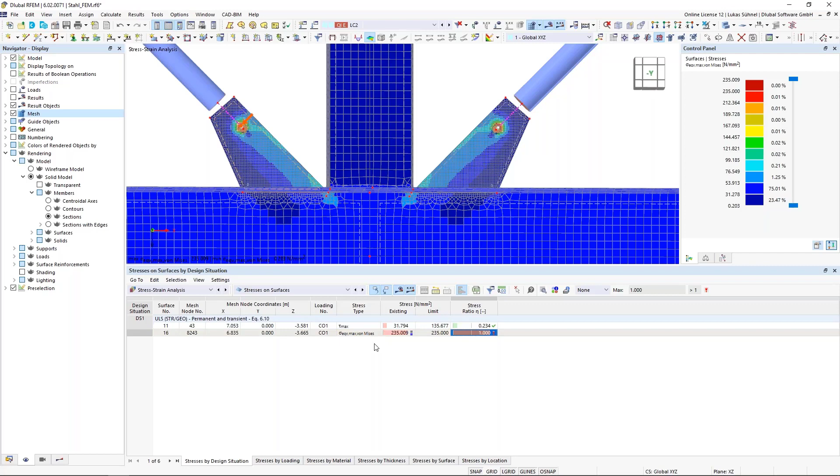Let's have a look at the results. I get the overview table where it says stress ratio is 1. If I check the details, it's just slightly above the limit, so it's just a numerical issue, let's say, not a big deal. We can neglect this. The stresses are, of course, fine, as you can see here. We have here 235 Newton per square millimeter maximum.

We also have this pixel-like display of results. That's the result smoothing that I changed. And of course, we can now also check the strains. As I said, this is now important. So instead of checking the stresses on surfaces, I can check my strains on surfaces.

And this table looks also similar. We have an existing strain, 6.2 per mil. That's, however, the total strain. The plastic strain is just 4.4 per mil. And this plastic strain will be compared to the limit of 50 per mil, which results in this plastic strain ratio. So this is the strain design, basically.

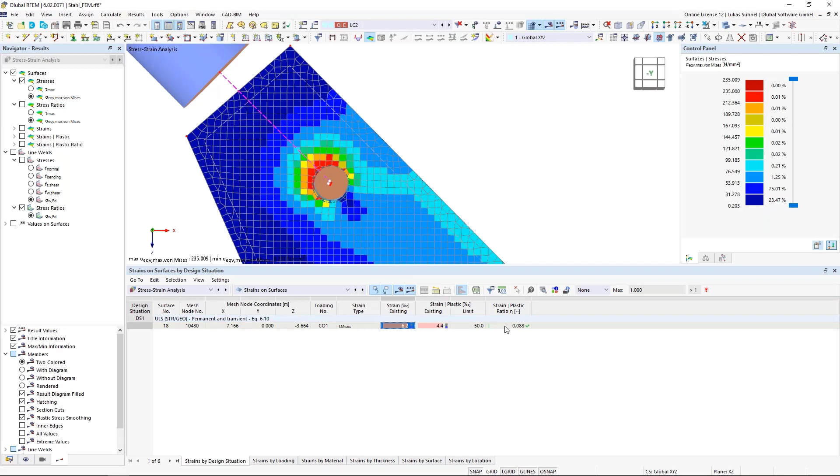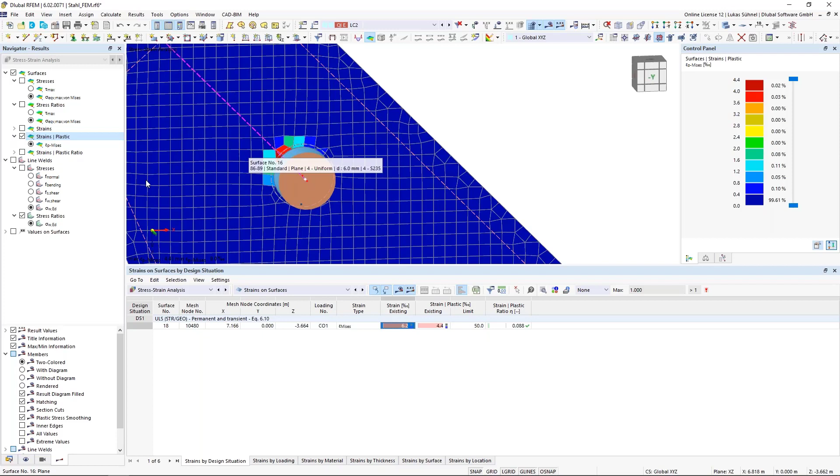This is how you can do it with the add-on stress strain analysis, and that is also what I would like to show you here. Maybe what I forgot now, we have, of course, also the strains as a result graphically, the total strain, but also the plastic strain, which is always smaller. And again, also the plastic strain ratio. Well, not much to see here, but the plastic strain.